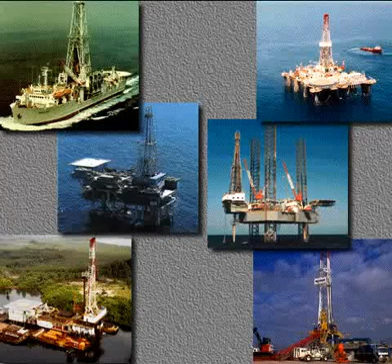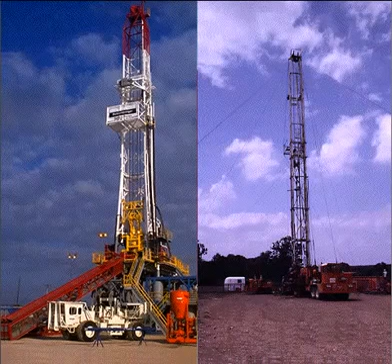Drilling rigs like these bore or drill holes into the earth, usually to find oil and gas. They work both on land and offshore. Some are big and some are relatively small. Big rigs drill very deep holes, 20,000 feet, 7,000 meters or more, while small rigs may only drill to a few thousand feet or meters.

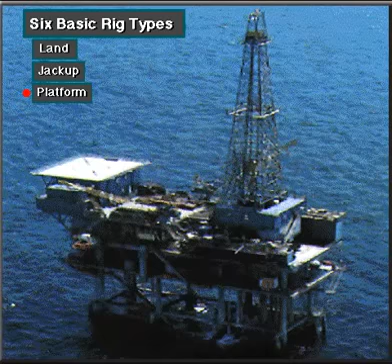People in the oil industry group rigs into 6 basic types: land, jackup, platform, submersible, semi-submersible, and drill ship.

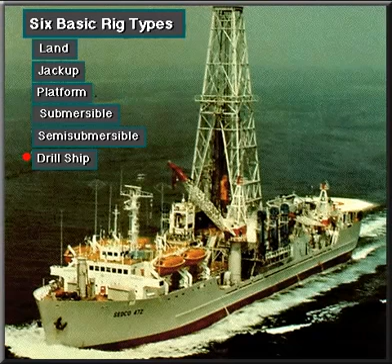A land rig drills on dry land. They're the most common rig. Light-duty rigs drill holes from about 3,000 to 5,000 feet deep, or 1,000 to 1,500 meters. Medium-duty rigs drill to depths ranging from about 4,000 to 10,000 feet, or 1,200 to 3,000 meters. Heavy-duty rigs drill holes from about 12,000 to 16,000 feet deep, or 3,500 to 5,000 meters. Ultra-heavy-duty rigs drill holes from about 18,000 to 25,000 feet or more, 5,500 to 7,500 meters or more.

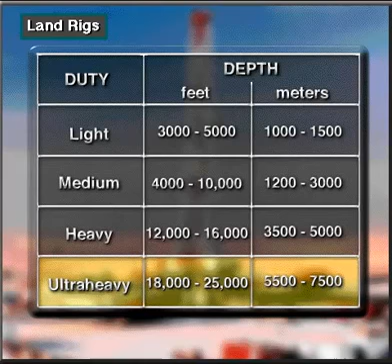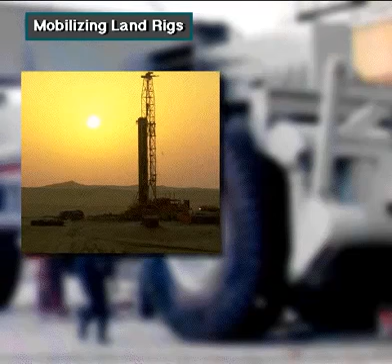Crew members can move land rigs on trucks, tractors, trailers, barges, helicopters, heavy rolling gear, skids, and, in rare cases, on specialized air pressurized equipment. Small, light-duty rigs are pretty simple to move. Ultra-heavy land rigs can be difficult to move.

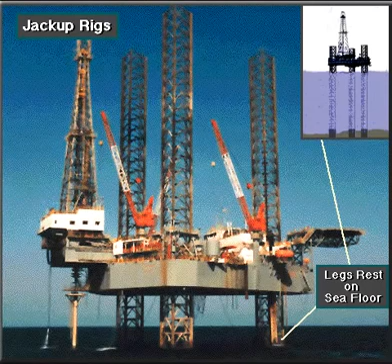A jackup rig drills offshore wells. It has legs that support a deck and hull. When positioned over the drilling site, the bottom of the legs rest on the seafloor. Jackup rigs can drill in water depths ranging from a few feet or meters up to more than 400 feet, over 120 meters.

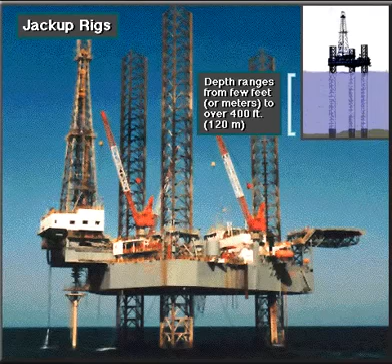Boats tow a jackup rig to a location with its legs up. Once the rig-up crew gets the legs firmly positioned on the bottom of the ocean, they can adjust and level the deck and hull height.

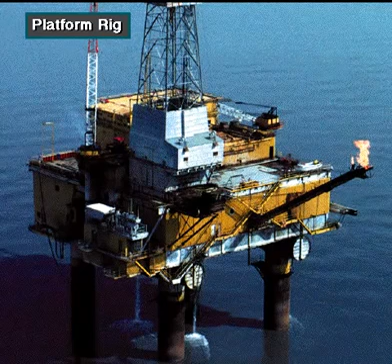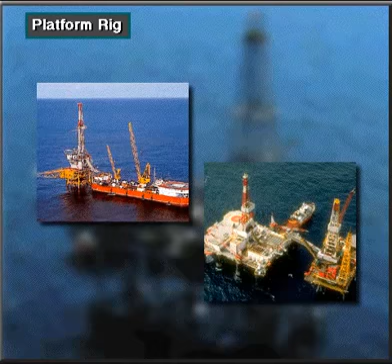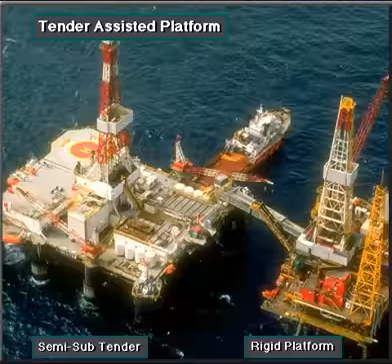A platform rig is an immobile offshore structure. That is, once built, it never moves from the drill site. Companies drill several wells from the platform. Platform rigs can be tender-assisted rig. The tender floats next to the rigid platform, which is firmly pinned to the seafloor. Many platform rigs do not have a tender. They are so large that they are self-contained.

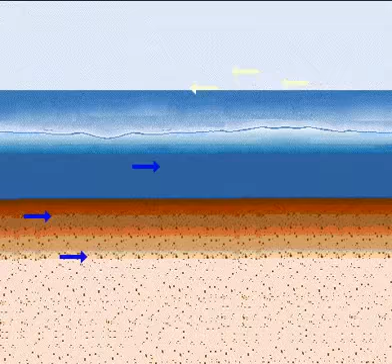Big platform rigs include the steel jacket platform, the caisson type, and the concrete gravity type. In deep water, rig builders have to make platforms that yield to water and wind movements. Two compliant platform rigs are the guyed tower and the tension leg.

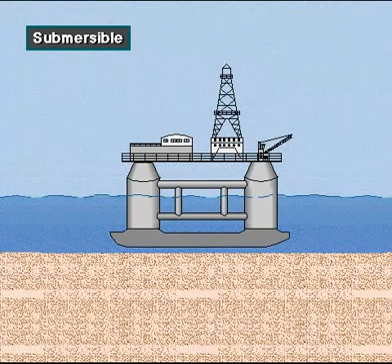A submersible rig rests on the seafloor when it is drilling. Workers flood compartments that cause the rig to submerge and rest on the bottom. When ready to move, workers remove the water from the compartments. This makes the rig float. Boats can then tow the rig to the next site.

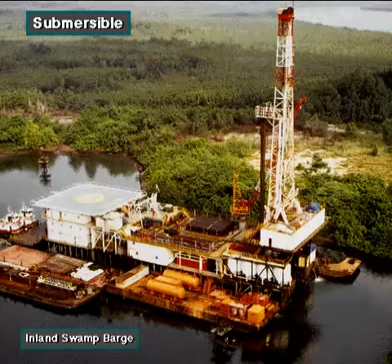Rig builders design submersibles to drill in shallow water and in water up to about 175 feet deep, a little over 50 meters. Submersible drilling rigs include the posted barge submersible, bottle-type submersible, and the Arctic submersible.

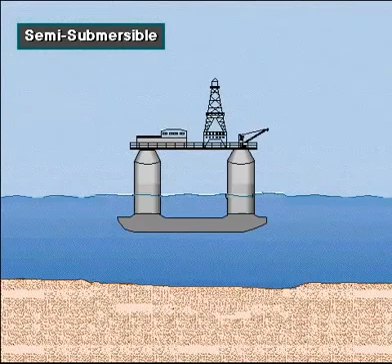A semi-submersible rig is a floating offshore drilling rig. It has pontoons and columns. When flooded with water, the pontoons cause the unit to partially submerge to a predetermined depth. The working equipment is assembled on deck. On the drill site, workers can either anchor the rig to the seafloor or use a system of thrusters and positioners to keep the rig over the hole.

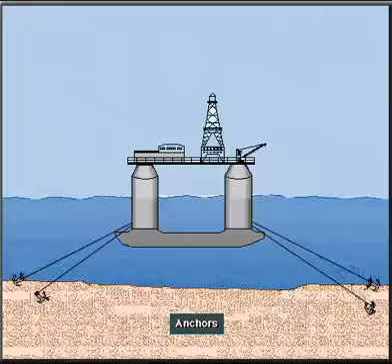Here, they have it anchored. Crew members mount the wellhead and blowout preventers on the ocean floor. Special hollow pipe, called riser pipe, connects the top of the blowout preventer to the rig.

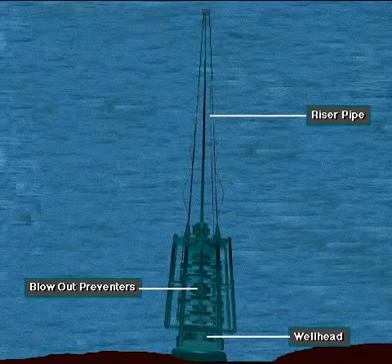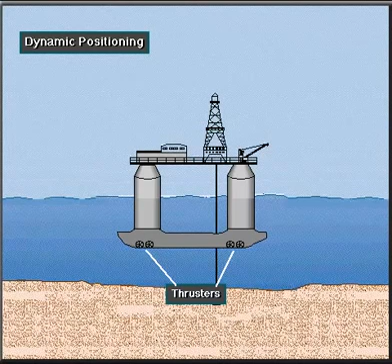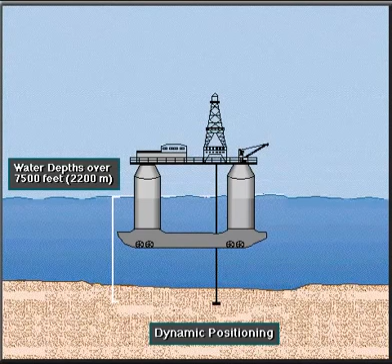In some cases, the crew uses thrusters to keep the rig over the hole. Called dynamic positioning, the thrusters, which are connected to an onboard computer, keep the rig in position. Some dynamically positioned semi-submersibles can drill in water depths of more than 7,500 feet, or over 2,200 meters. When keeping a rig over the hole, drilling crews use the term on station.

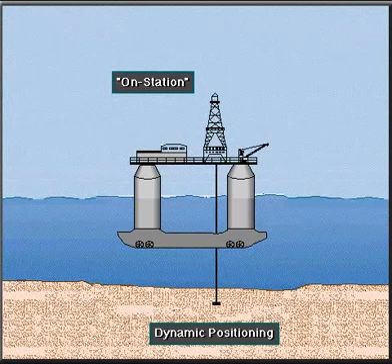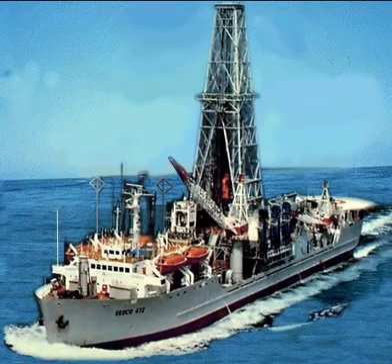A drill ship is a self-propelled floating offshore drilling unit. It usually uses a subsea blowout control system similar to the one on a semi-submersible.